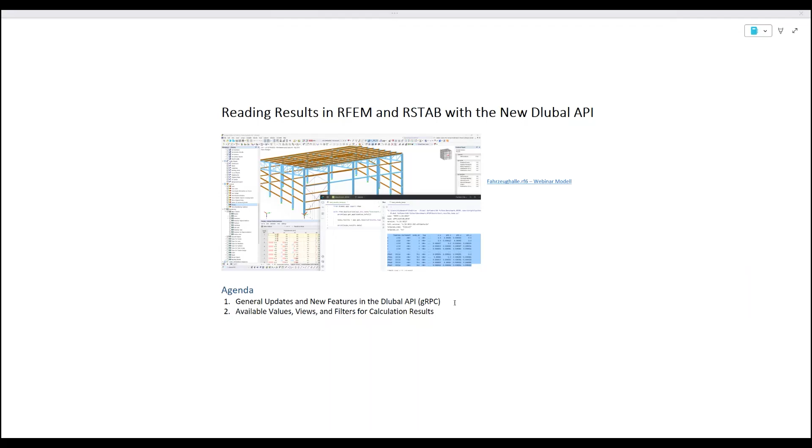The second part is our main topic, working with the results. Therefore, I will show you some code. We go through the application together, look a little bit into debug mode and see how this is structured in the background, how you can work with it, and some best practice tips, also working with metric and imperial units with our results. So stay tuned and I hope you enjoy today's webinar.

So just try it out, go into the basic settings of your program. I will make a quick look around after this on how to get access via the API, but there's also a first webinar in this series with more focus on the basic settings. So today, I assume that you already know how to set it up, how to do your authentication, how to get an API key. All this is still valid, but we changed the subscriptions. So you just have to take care that you have an API key, made in your extranet account. Look at the previous webinar for that, please.

In contrast to that, we have another pricing model where you can now use 1,000 API requests per month for free, with full access to the features regarding input data and the results which we are demonstrating today. What's important to mention: we changed the way the requests are counted. In the past, there were some special requests we counted. Now we are counting everything except for some service requests. Service requests are like printing the application info or getting some technical information. But everything that has to do with modeling or getting results is a counted request.

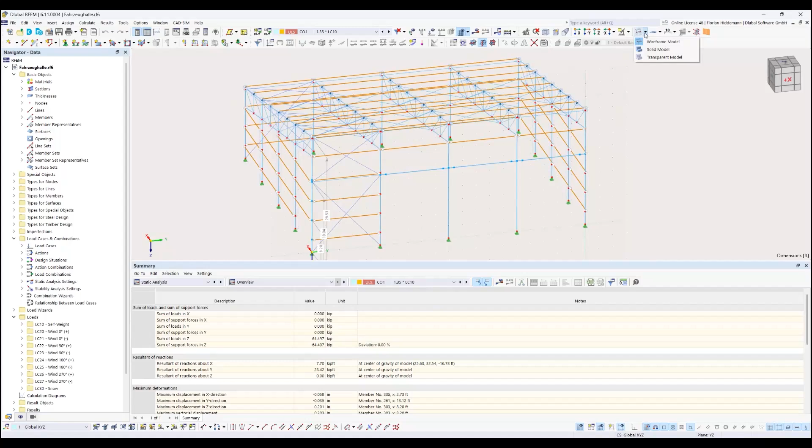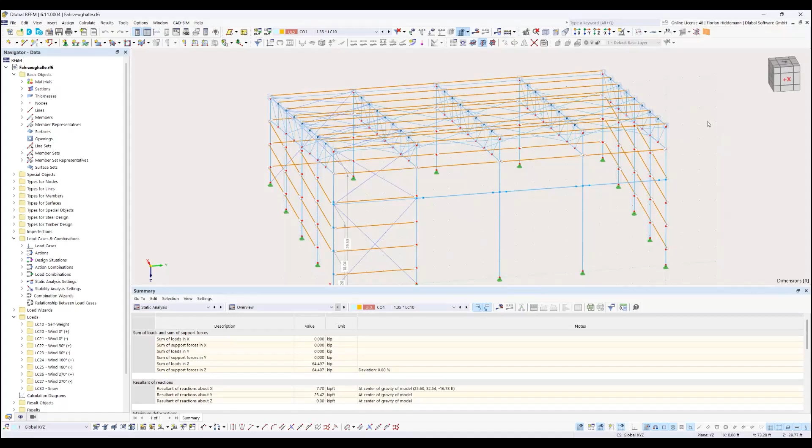So now let's jump into the code and the program I would like to show today. I have brought an example model here. This is just a little construction with steel cross-section profiles and timber together, so I can demonstrate some results from the add-ons as well. And this model will just provide some results which we analyze and get via the API. So it is already calculated.

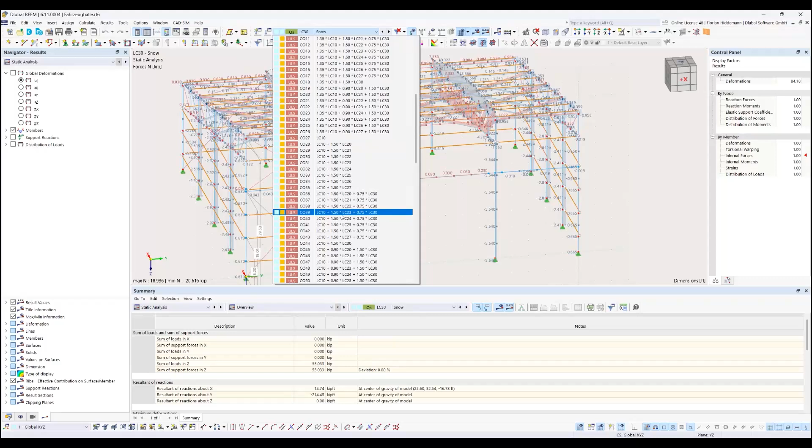We have some results here in the graphical user interface. You can see there are some imperfections defined in a few directions. We have the wind load assistant here. The snow load is applied, and it produces a lot of different combinations. And we will focus on getting some results and working with them via the API now.

So I'm using an IDE here, PyCharm. It is available for free. You can, of course, use whatever you want. But here I will go through these chapters together with you to demonstrate how it works. First of all, before we get into the results themselves, I'd like to highlight the differences you need to assess for RFEM and RSTAB, because we are quite proud that this is available via one package.

As you might know already, from dlubal.api you import rfem to work with the application, and then you define every object, every call, every method with this package. And what do you have to change if you want to work with RSTAB now? Not so much. I copied the example from our website with multiple models, and you can see the difference here. Now we just import rstab, not rfem, from the Dlubal API, and work with it exactly the same way. So it's really unified.

The only difference is that in RFEM, maybe you know it, we have lines as a basic modeling element, which do not exist in the RSTAB world. So in RSTAB, we define our members by nodes. And the only difference for these model examples is that in RFEM, we define the member on the lines.

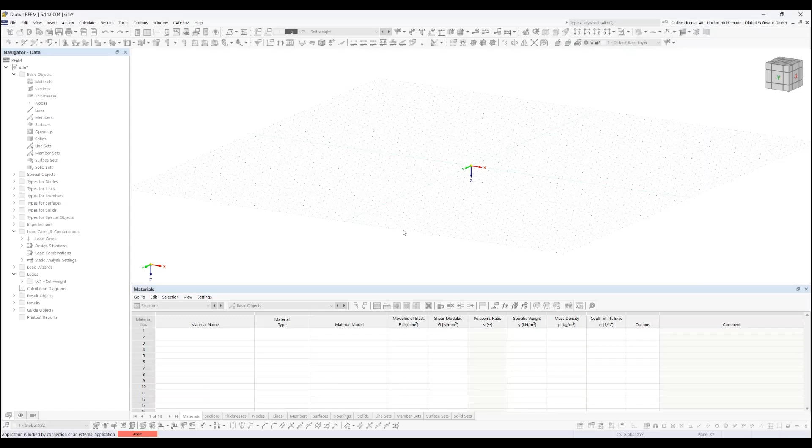So demonstrating it here, we just run the script, and our example model now created here a silo, which has surfaces in it. And here a simple example of a steel hall. In the same way, I also have RSTAB open.

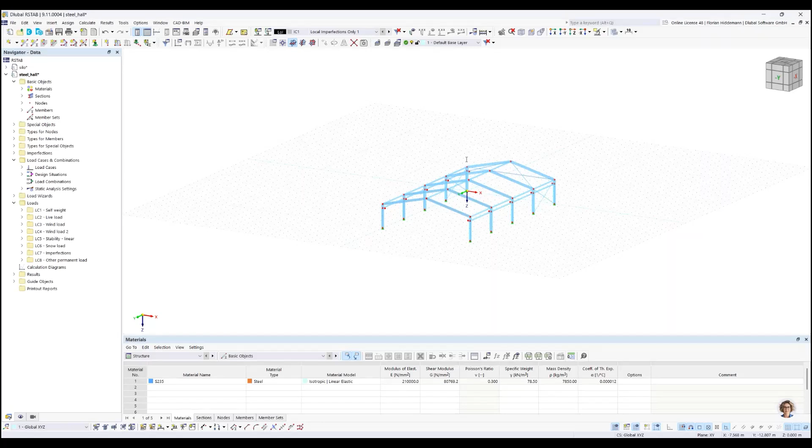It's empty for now. I go to the RSTAB script, do the same, just execute it. And I will now switch here, and you can see now also RSTAB can be controlled via our API. So far so good. I will switch back to RFEM and open our example model for the results.

So now let's get to the results. You should import pandas for use with results, because when we try to get the results via the API...

This object here you will receive via the API command get_results. This is not the data frame from pandas in the first place. This is something you have to remember and use in your code, making sure that we access the results via a data frame. The results here are stored in results.data, and under results.data, the pandas data frame is stored.

So if I get my results from the RFEM API, I use this method, like it's also described in our documentation. For those who don't know it, we have a very comprehensive online documentation. If you have a look into it, get_results takes some arguments: it can get the result type and the filters. Filters I'll show you later.

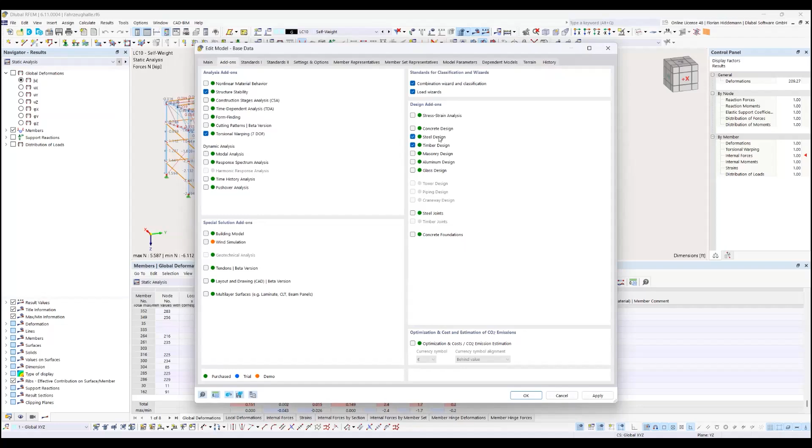As you can see here, some of the add-ons are active. In this example it's steel, timber, structure stability, torsional warping, and you can find these marked as true, together with some other settings. This is very, very useful if you'd like to set it up completely automated via the API and build a model from scratch.

So how to change these things?

The recommended way is that you get the base data first and then manipulate this object according to your needs. So if you make a new model—I already have one open in the background—I will change the base data. First, you get this object, and then you change it via accessing these properties. For example, if you want to make the steel joint add-on active, you just set it to true. In the next step, you set the base data with this manipulated object.

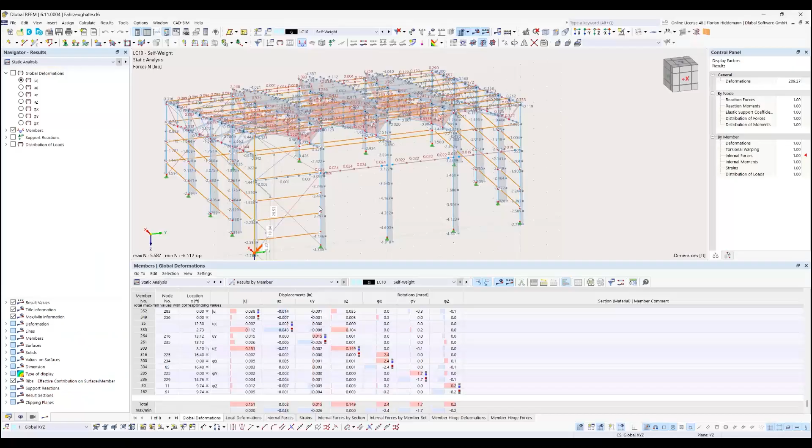I want to change something more, because as you know, we provide a lot of different standards and codes, and it's important that these correspond with your needs. Here I start with our European codes and German national annexes, as you can see, set up for my local country, Germany. But maybe you want to change it to other standards, and for this reason you can just change it in this way.

I defined a little dictionary here. You don't have to, but I think it's neat to do it this way, where you say these are every time my standard configs I want to use. For example, for the load wizard, you take ASCE 7. For the steel designs, you take AISC 360, one of the actual versions, and the timber design group, etc. These are just defined with the enums we provide under RFEM base standards.

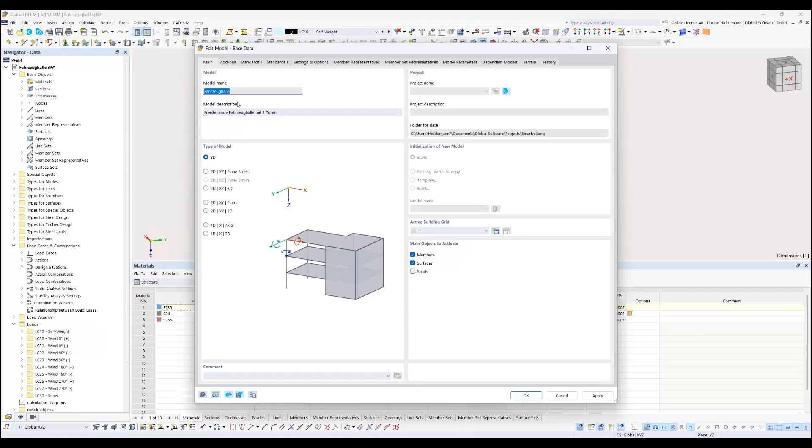Then I build a loop which takes these keys and values and changes my base data object I got from this call. And if I process this now, it changes the configuration of RFEM in the background. So if I go back now—last time we looked into it we saw European and German codes—now it changed to ASCE 7.

Even with the wood standard group, I've done it—timber design—and I also activated the steel joints add-on. So this is a very neat way to make your setup automatic. You can even change things like the global axis orientation, whether it goes upwards or downwards—everyone has their own favorite settings here. In this way you can edit the base settings and make add-ons active, change the code, etc.

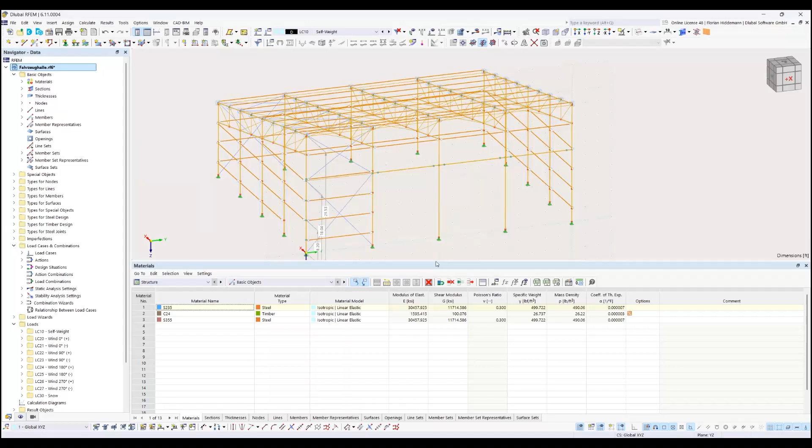So once you were doing this, I go back to the European codes for now, because I calculated the results with them before this webinar. And what we are doing with the results now is we want to see the results from the steel design add-on and timber add-on, because this is also a new feature—we can access a lot of different results now.

Our philosophy in the Dlubal API, for those who are maybe confused now, is a lean approach where you have only a few necessary commands and a lot of different objects you can define.

So for the client itself, you see here these are the available commands—they are as general as possible. And with the model or the object definition, we try to define everything you want to access or change in the program. So if, for example, you want a specific result, you define a result type, go into it with an enum value, and hand this object over to our getResult request. This is the idea behind it.

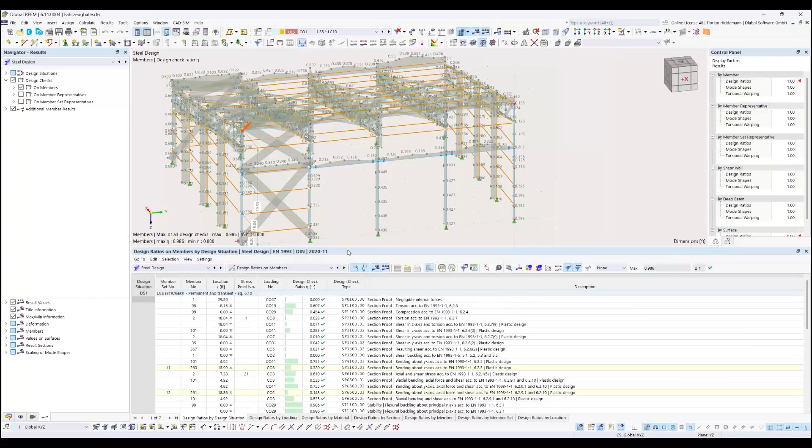So the model just loads up in the background. Perfect. I pre-calculated it with some results from the steel design. So here are some errors and warnings, but we have also gathered results and can see we've done some checks about it, and I want to access these now.

So what do I do? In the app with the client, I will get different result types in this call. And because at the moment we need to call different requests for different result types, in the future we are planning to also allow a list for this, so that you can define a list with different result types.

But it has also some disadvantages. The advantage here is that with a big amount of data, it is more stable to transfer it in small chunks. So if I want my results for steel design, I have this result type here with steel design member design ratios. And for timber, I have a different one.

And I built now here in my construction a dictionary where I put every request into this dictionary under the key steel and timber. This is my personal solution here, to have a single result dictionary in the end which contains the data frames under these keys.

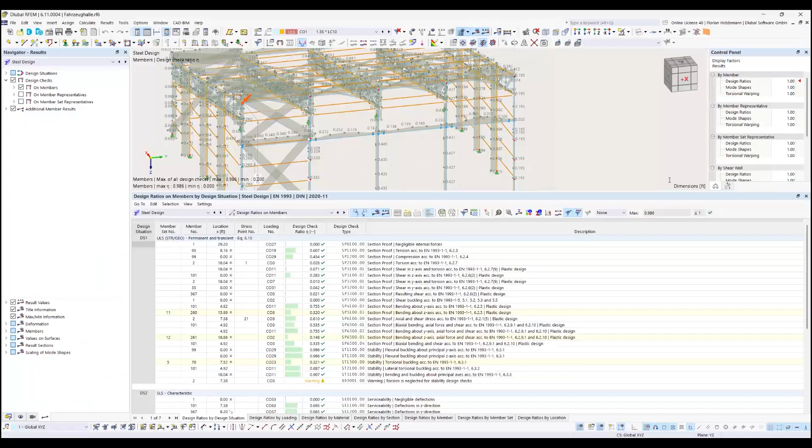So, and what we can see here is it found that for steel design, no member is with a design ratio bigger than 1. And for timber design, there are 1, 2, 3, 4, 5, 6. And I just ordered them in a sorted list here for me. If you do something in your code, you have your own use cases. This is just for demonstration purposes, just to show how this works and what you can do with it.

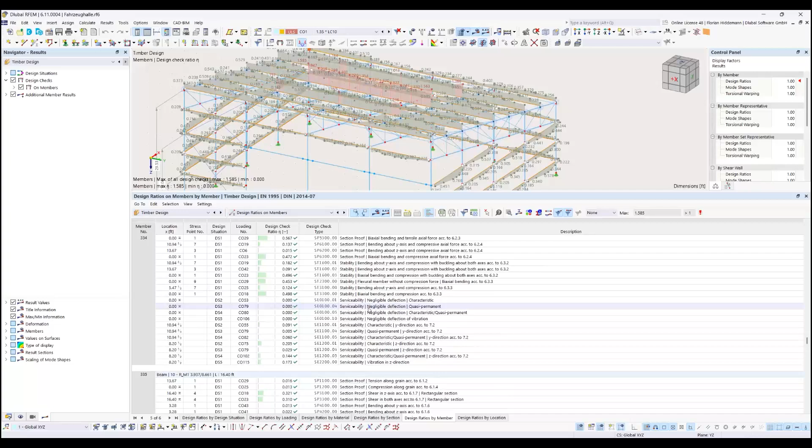And as you can see here, there are a few objects in timber design where this model here is not optimal from a statical point of view. But for demonstration purpose here, we found that some objects here have design ratios over 1. And if we go into the details, here you will find the same objects like we found via API. For example, member 334 was overloaded, and this is also one in the list. And if we go to everyone else, we analyze these data here via the API now.

So as you can see, we can make use of the add-ons as well. And what is available, you can see it on our online documentation or here directly in the API. This is a lot by now. We have it for aluminum design, concrete design, pushover, structure stability. It should be almost complete.

If you found any result you need which is not part of this list yet, please contact us, write us an email, go to the support contact, and we will try to make it possible for you. We want to have a full approach that we have a complete access to all our relevant results here.

So, and as you see, it took some time to transfer all this data, and the analysis of it is very fast with Python here, my local machine, but the transfer took some time. So it might be useful to filter these things. So there are two strategies you can use. One is on the client side, like we did it in these examples here. So we just get all our results and then work with them by filtering in the data frame.

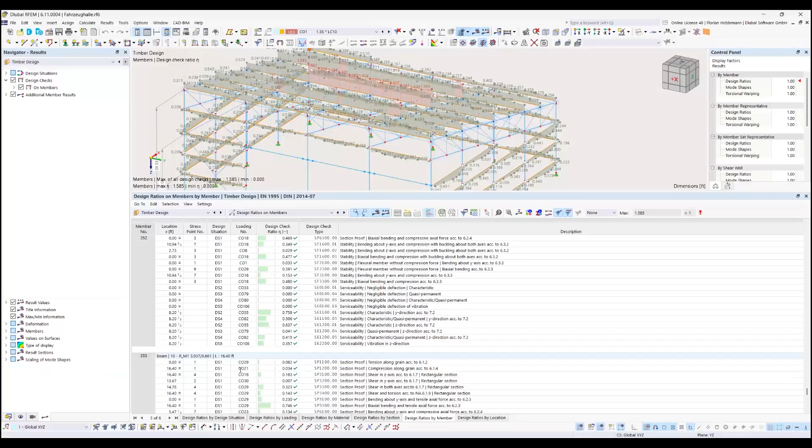But of course, this version here, this format is not very good for practical use. So in the examples, I just wrote, to give you an idea how to work with this in a best practice style, a little module, the unit converter. And here I have just defined a unit mapping where I want to define once: every time I have a column with N, I want to convert this from Newton to kilopound.

And even if it's made with vertical shear forces in y direction, or if it's defined in local axis direction with u and v, I just define here from what unit I want to convert. And so this little function here, convert metric to imperial, is not part of the API, but you can write a little util function like I have done here and use it. It's very, very small code for a big advantage, I would say.

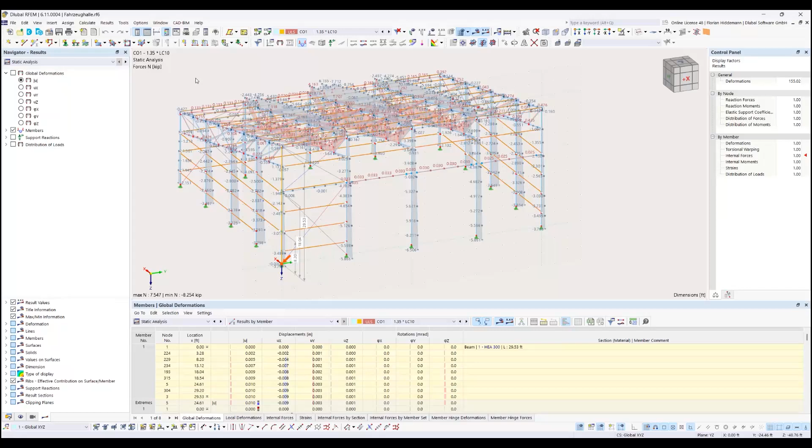And as you can see, it took under a second, 0.97 seconds. And here now, everything is in imperial units. And since we cycled over every member force, I can maybe go to DS1 because it should have the heaviest one. So maximum is 45,729, and minimum this value, and you can see this is working right.

So this is quite a clever way to make use of our data frames and some popular Python libraries, and I would like to give you this in the hand. Of course, after the webinar, I upload these examples on our website so that you can study this for your own purpose.

So the last topic before we close now is results versus result tables. I want to show you in the last minutes how this is working. It is, in fact, the same way you are used to. We just have another API method in comparison to get results; we also have get result table. And if you want to have a get result table, you have to filter. This is something different than working with our normal get results function. Here you can define the result type and you get everything.

The filtering here is optional. If you do it on the server side, you can make use of a result filter, which looks like this, but you don't have to. The result tables are working differently. If you want to get a result table, you use a different API call. And this needs the filtering because in RFEM, in the GUI, you would have the same options. You would say it's results by member, and you filter these tables by, for example, a load combination, and you go to a specific tab here. And you have to put this information in the definition here to get the same result table.

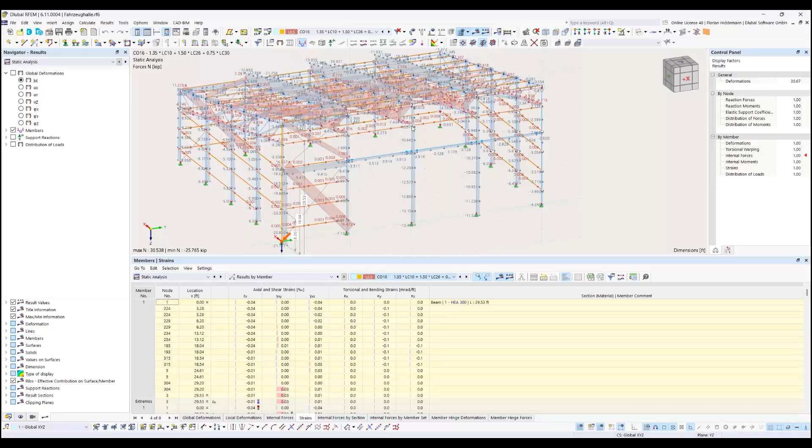So you define the table you want to see. This example is static analysis member internal forces. And you have to define the object you want to see. In this example, it's an RFEM object of type load combination. The enums are available in our package, with the number 1. So again, we will expect the result table internal forces with this setting. So we want to have exactly this table now via API.

And you can see, I just print every column here. You get exactly the same layout like you are used to in RFEM, but be careful, you have to check it. Some examples here have different columns, like if you have the normal force here and the vertical shear forces, these are with the index for the global axis.

Obviously, if you have the internal forces here, it can also be that you have the local coordinate system. So here in the result table, the indices are for the local coordinate system. In the RFEM GUI, these are the global indices here. So different ones. Make sure that you double check what you have delivered in the result tables.

And again, same principle. If you make a result table call, you have to access the data within to get the data frame. And what I did here is just make use again of my converter to get this data frame with the member forces of combination 1 and convert them to imperial. So the values you can see here are converted.

And you can see here, we also print out the summarizing lines, which are usually at the end of those tables. There's a total max min here. And now we have a total max min, again with 7.5. And without any processing or searching by myself, the result table is providing this as well. So the total max, total min, this is a tag column. And for N, these are the same values we have seen before.

So the last thing to close with, get errors and warnings. Also a nice and handy feature, because this is also a special type of result table. And just to mention it in its own example, via accessing the result tables, if I have an error and a warning, I can access this table too. And this is something clever if you want to go to error handling.

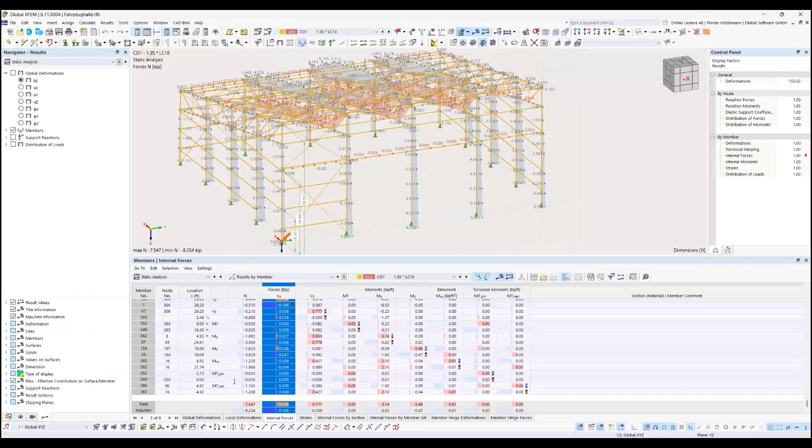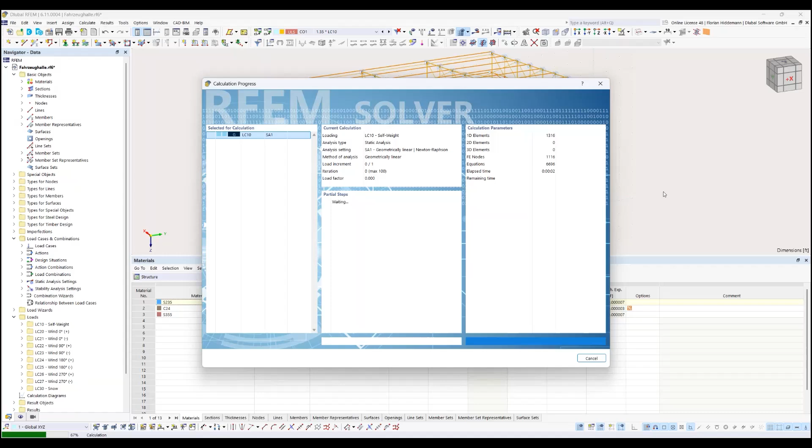If I change the model slightly, and with slightly I mean delete one of the main columns, I just try to calculate now, let's say self-weight. You can expect that the calculation will not be happy about this, and we have some stability errors. So when this happens, of course, I expect you to do plausibility checks and have a try except loop if you want to calculate with our API.

But maybe you want to access this information now. And this is also a result table. We have the errors and warnings here. And you are used as a user to look where it happens. What can I do? You have an error warning code, where it happens. And exactly this information is accessible via the errors and warnings table. So this data frame here is printed in the short version. So we set the option that it prints every column.

Oh, yeah. So import pandas. So you can see the full information is available. You have the columns here, like in the GUI, which load case, which object, the warning number, and what is the text. And if you access the data frame directly, you can see there is a full description available. We can go into the debug mode to show it. Click in the data frame and you see here, this is accessible as data completely. The same strings.

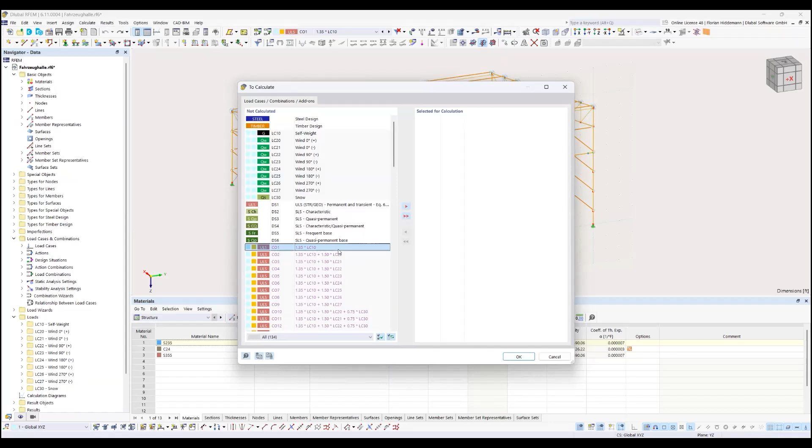And my relevant loading here is defined in the way with an RFEM object ID from object type load combination. You can also use load cases and different numbers here corresponding to your RFEM model. Let's see if I just give the column here back. And I test it. I calculate only load combination 1.

Now I should have some results again, but only for this load combination, not for another one. And let's check it here. So what should happen? We should see that we have results in general, and we have results for load combination 1. We don't have results for load combination 2.

And here I just got again result table member forces for combination 1, which I could have controlled by the true value I get from this check here. So that was a lot of code in detail. I hope you enjoyed it a little bit.

It's difficult to show this very theoretical stuff and codes, but I'd like to also give you a deep dive how it works, how this looks in action, and yeah, you are only limited by your creativity what to do with it, with automated design checks, with user-defined workflows, process the information in other workflows, whatever you want.